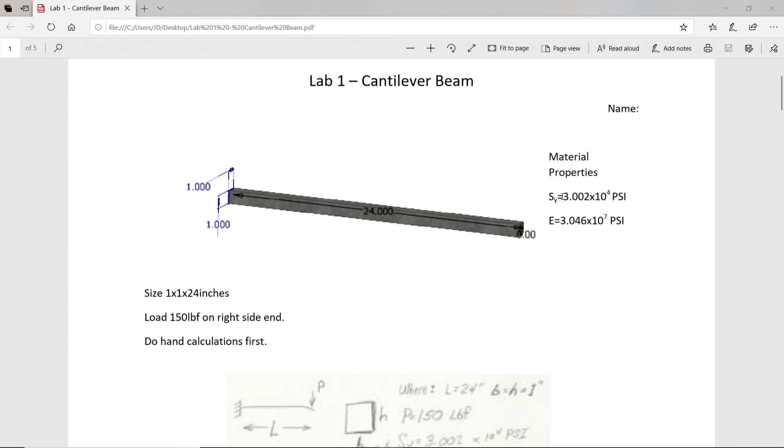I have a beam that is a square, 1 inch by 1 inch, and 24 inches long. My material is mild steel with these properties of elasticity and yield strength. Load will be a 150-pound load on the right side end, with a fixed constraint on the left side end.

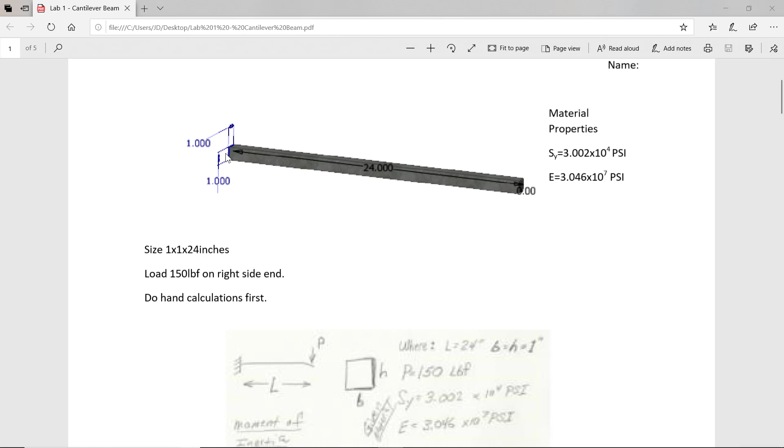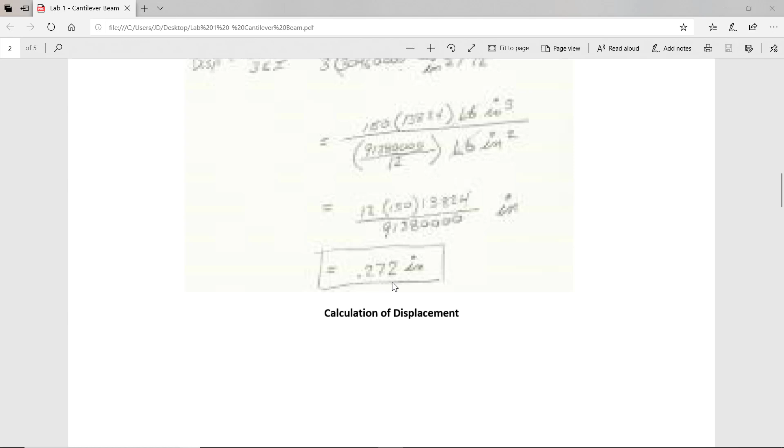If you do the hand calculations, and again these are in the Machinery's Handbook, I come out with a hand calculation with a displacement of 0.272 inches. I get a calculation of the stress, 21,600 psi, and a calculation of the safety factor of 1.4.

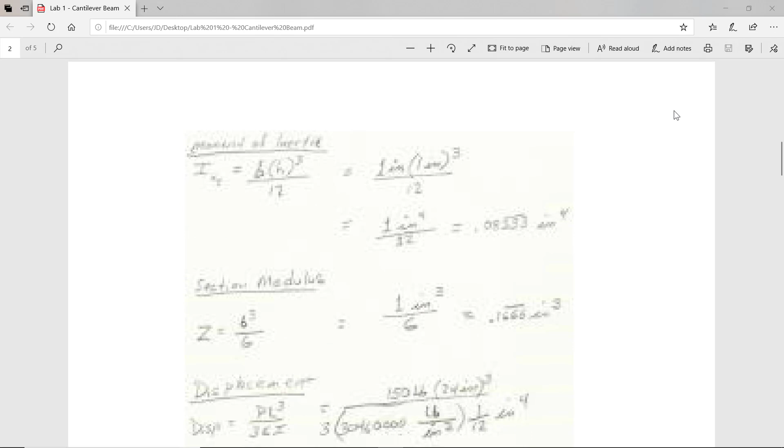Let's set this up in Inventor and see if we get the same numbers in Inventor that we get with our hand calculations. I'm going to start by creating a new part file, and I'll go ahead and save this as lab number 1. I'm then going to start a new sketch on the XY plane, and I will draw a rectangle in space to the right of the origin, and I'll put a coincident constraint from the midpoint of this vertical line to the origin.

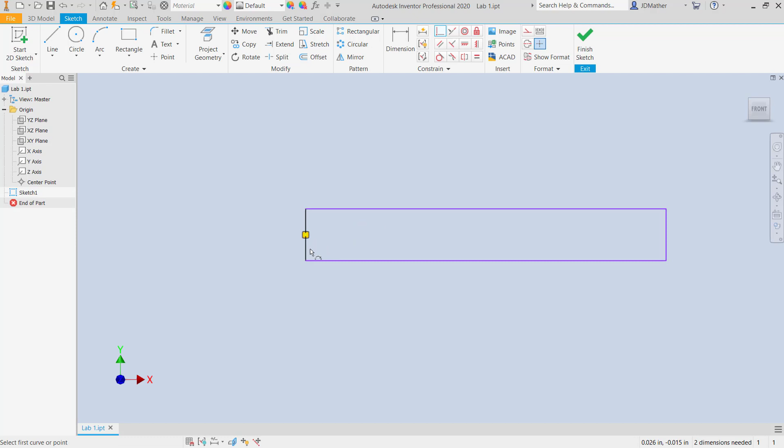Now it doesn't really matter where we locate that constraint, and I will dimension the height of this rectangle as 1 inch, and I'll dimension the width of it as 24 inches. Alright, then I'm going to extrude this, and I will select the distance for the extrusion using this variable. So I'm going to go mid-plane 1 inch for the extrusion.

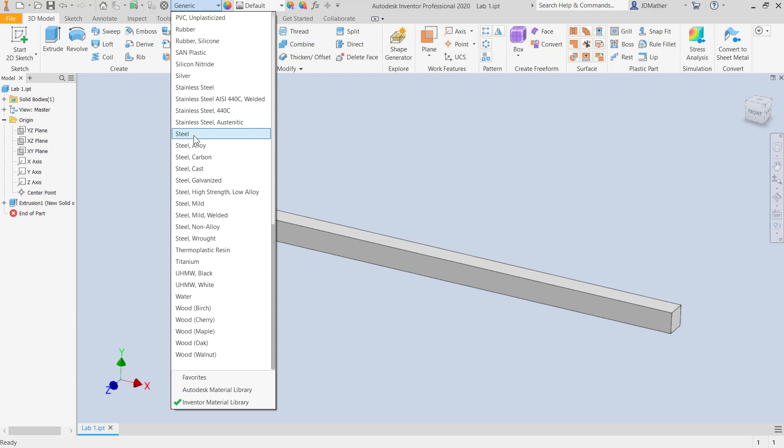Save it. Alright, now I'm going to assign the material, and so I'm going to assign steel, and I haven't decided whether I want to do steel or steel mild. Let's look at the properties of steel, and so I'm going to click here, and I'm going to click the edit pencil, and I will go to the physical tab, and I'll go to the mechanical and the strength, and I see that these units are in metric units, so I want to look at this in inch units since my problem was given in inch units.

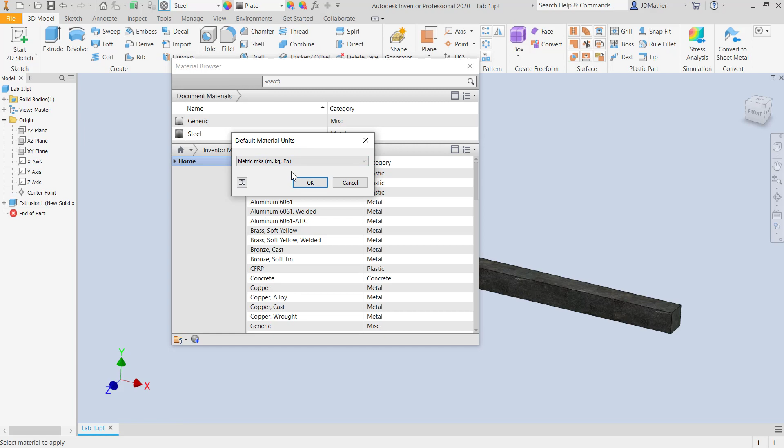So I'll cancel out of that, and I'll come down here and I'll say set display units, and instead of meters, kilograms, pascals, I'll set inch, pound, second. Alright, now I'll click on this edit pencil, and I'll go to the physical tab, and I see that Young's modulus 3.046 and the yield strength 3.002 times e to the 4 psi.

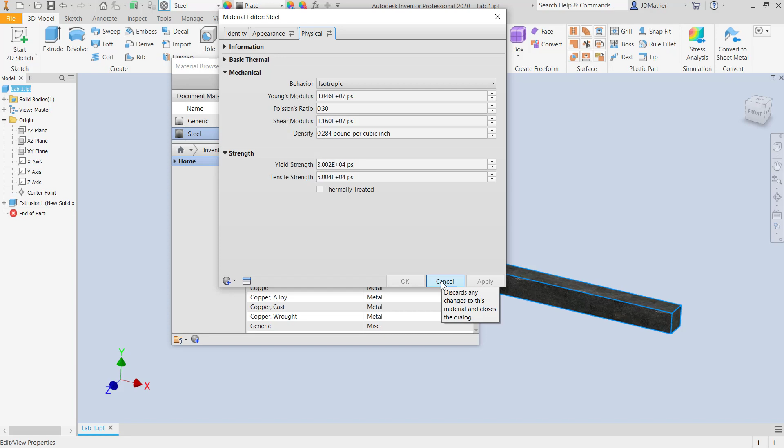Now if you're not familiar with scientific notation, you're probably not quite ready for doing FEA analysis yet, so go back and review scientific notation if you have forgotten what that means. I'm okay with the properties of this that match our problem description, but I'd like to change the color of this part just to make it easier to see as we continue on, and so I'm going to set this to a light gray, and I'll save this setting, and then I'm going to go into the FEA analysis.

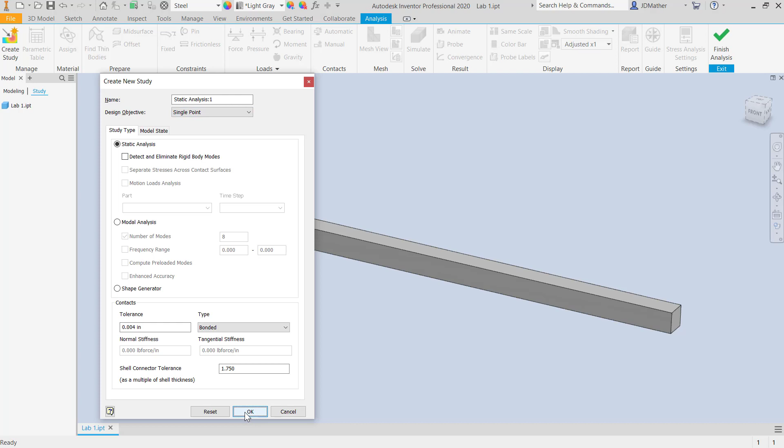So I'll go to Environment, Stress Analysis, and I'm going to create a new study. This will be a static analysis, single point analysis, so we don't need to make any changes here. We'll say OK to that. I've already assigned my material, so I don't need to go in and make any changes there, but if I wanted to do an analysis, say with steel, with aluminum, with different materials, I could just copy this study and then just check with each individual material.

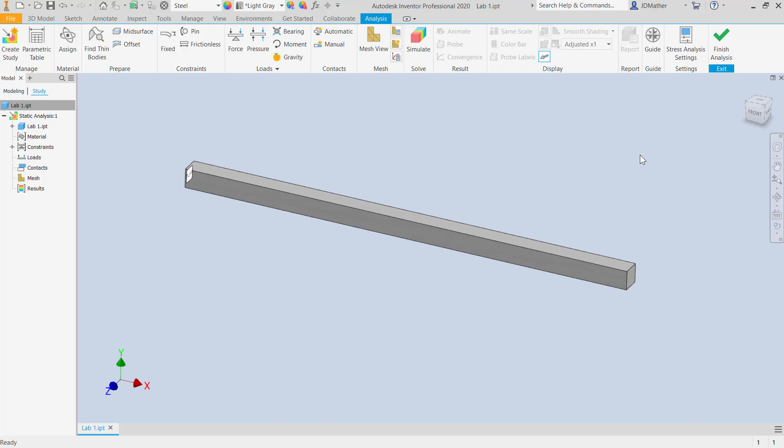So I'm going to then do a fixed constraint on the left end of my part, and we're going to do this analysis without consideration of gravity. The part's only 24 inches long. Gravity would have a minimal effect on this part. Then I'm going to do a force on this end, and I want that force to be pointing down, so I'll get the selection tool, and I could either pick this edge so it follows that edge, or I could select this face. It will then be perpendicular to that face, and I'm going to do 150 pounds force.

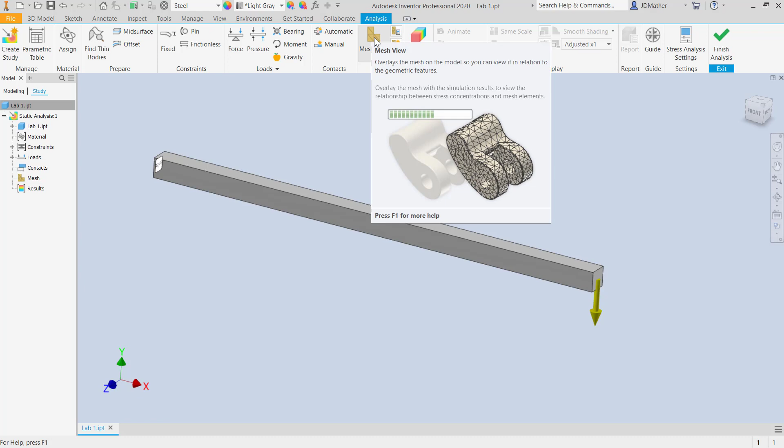I'm then going to come over here, and I want to select mesh view, and we see that it meshes our part. Now we may want to increase that mesh density, but for now I'm just going to leave it on the default setting for that mesh density. In future problems we may run a convergence analysis where we increase that mesh density, but I'm going to leave it on the defaults, and I'll go ahead and run the simulation.

When I run the simulation, I get a stress value of 21.77. And remember, this is KSI units, thousands of pounds per square inch. And if you remember in my hand calculations, I had 21,600. Here I have 21,770. So essentially it is the same number. If we calculated the percentage difference, it's less than 5% difference from our hand calculation.

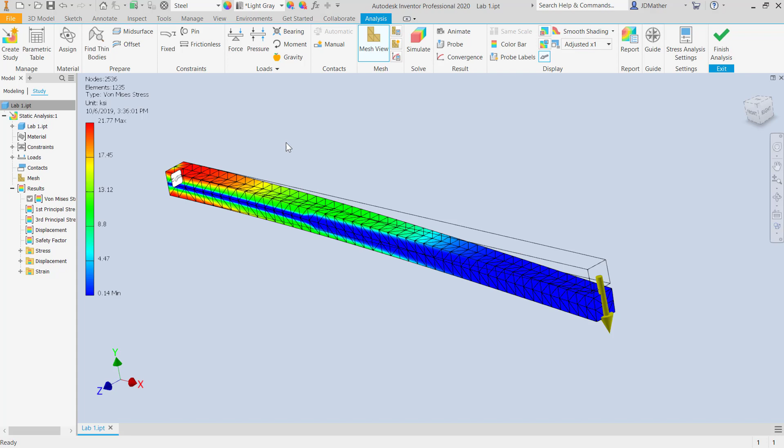And if we had, say, 20 of these beams and we did a physical experiment where we put 150 pounds on the end of it, we're going to get a slight variation from one beam to the next anyway, but it should be within a ballpark range. And we're doing finite element analysis, not infinite number of elements, and we haven't refined these elements. We're really close to our hand calculations.

And let's go to the displacement. For the displacement, I have a value of 0.272 inches. That's identical to my hand calculations. And if I do then the safety factor calculation, from the hand calculation I had 1.4. If I round this off, 1.38 is 1.4. So we get essentially identical numbers to our hand calculations.

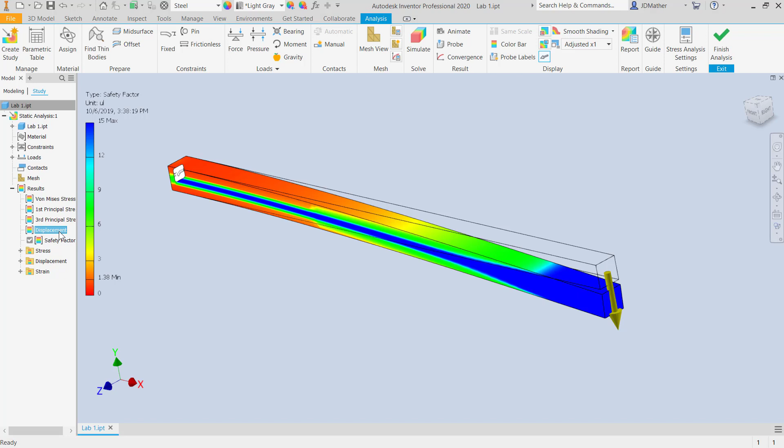I'll go back to this displacement for a moment. So I have a displacement of 0.272, or about 1/4 of an inch. And remember, this thing was 1 inch. It looks like it has displaced more than 2 inches. It's one of the most common questions that comes up on the internet. The displacement isn't this amount; they've ignored the amount over here. This is just a pretty picture. And in fact, this has been adjusted so that we can easily see it.

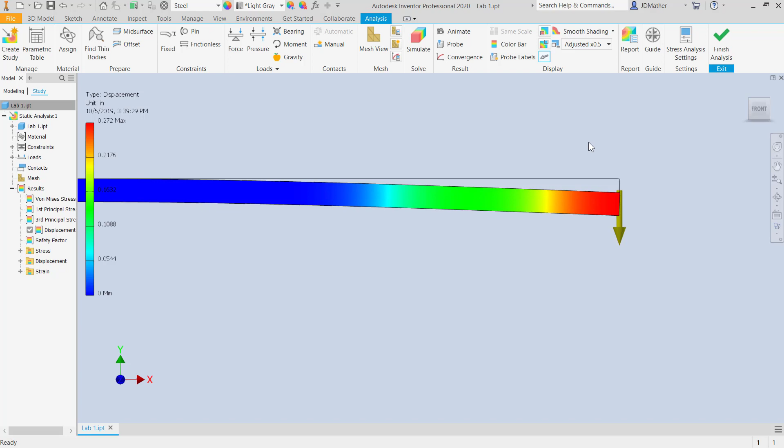If I put it on actual, in this case we can see about 1/4 inch displacement, but a lot of times we have so little displacement we can't really see it, and so we exaggerate this. We use this adjusted exaggeration to make it more obvious what we are looking at, or where the displacement is occurring. Okay, so that was a first test. We compared the analysis in Autodesk Inventor against our hand calculations, and we got essentially the same value.